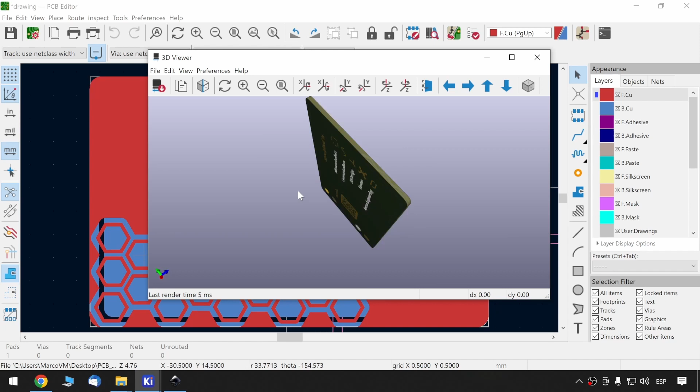Today we have a very exciting tutorial where we'll be creating our own PCB business card. We'll be using KiCad 6 and Inkscape version 1.0. We'll also be manufacturing this PCB in China and having it delivered to our door. It looks something like this.

Amazing. So, as I said, we'll need Inkscape version 1.0. This is very important because we'll also be using an extension that's only capable of being used with Inkscape version 1.0. As I said, we have to go to version 1.0 and download it for whichever machine we're using. In my case, I'll just download this exe. I've already installed Inkscape, but this is a very simple installation which you will have no problem with.

Then we have to go for the extension. It's called SVG to Shenzhen. This extension will allow us to deliver the drawing that we do in Inkscape into a format that KiCad 6 can read. It's been abandoned for like 2 years, so that's why we need to download specifically Inkscape version 1.0.0, because I've tried with other versions and there's no way to get it going. So we'll go to releases and download the latest release, which is 2.18.7.

We'll download the zip and open this. We have to extract this in a folder which is in users, your name. Here we have to search for the app data folder, which is hidden, so maybe you have to click this icon here on Windows. And as I said, app data, roaming, Inkscape and extensions. In my case, I've already copied this, but you'll just have to copy this from this zip file to this folder. Then we start Inkscape.

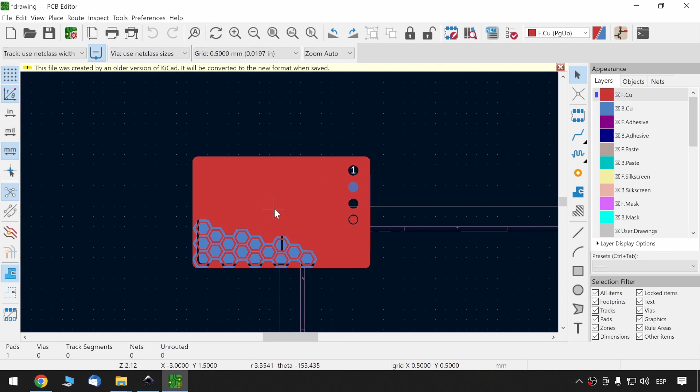I'll click on Flatten Bezier, which will be useful if you have any lines in your drawing, and click Apply. It will think for a few seconds. And it's ready. Now on my new folder that I created before, I have all of these files, and we're interested in the PCB layout. As you can see, everything went very well.

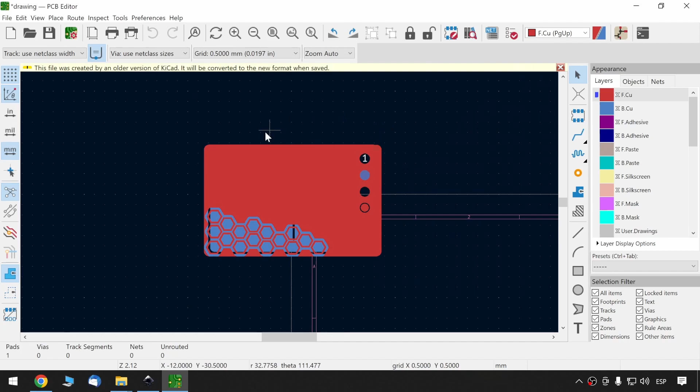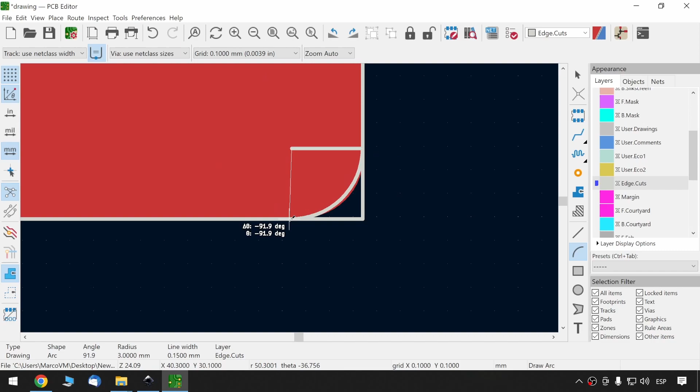All of the layers are here, and if we look at it on the 3D viewer, we can see a small problem, and that's that we don't have the edge cuts layer, which we'll be drawing now. Some people are lucky exporting the edge cuts layer, but I've not had any luck, so I'll do it by hand here. So it's finished. I'm sure there's an easier way to do that, but here we are. Let's see it on the 3D viewer. Everything's okay.

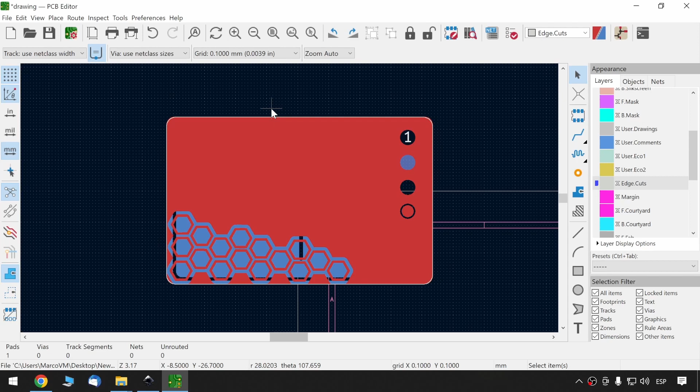So time to export it. We have to go to the plot menu. We will be outputting it in the Gerbers directory. Let's generate the drill files. I'll just simply use the default ones. Generate drill file. Done, no problems, close. This is not a problem for the use case we are using now, so let's simply hit plot.

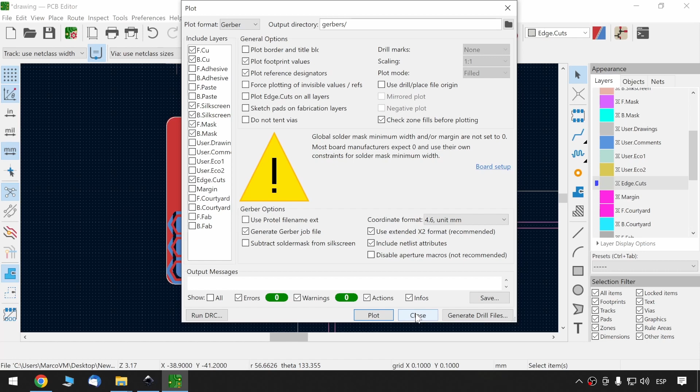Let's close it down and let's get into our file. Here are the Gerbers: front, back copper, front mask, and PTH, which are the holes. Let's zip it. So let's upload these Gerber files to the JLCPCB webpage. Let's add the Gerber file. It will take some seconds while it processes the Gerber files. And 85.6 by 54. Everything seems to be correct.

I love the black color of JLCPCB. It has that matte look that I love. And if you're going to be handing out these PCBs, you should be choosing lead-free HASL, because you don't want to be giving out lead to everyone that you meet. This will make the PCB like €1 more expensive, but we can deal with that.

You can also choose a smaller thickness of 0.8 millimeters, but this will bring the price to like 18 times more expensive. So we'll just go with the 1.6 option and the lead-free HASL. I also like to remove the order number, which makes it a bit more expensive. And that's about it. I'll just save it to cart and have it delivered in around 12 to 15 days.